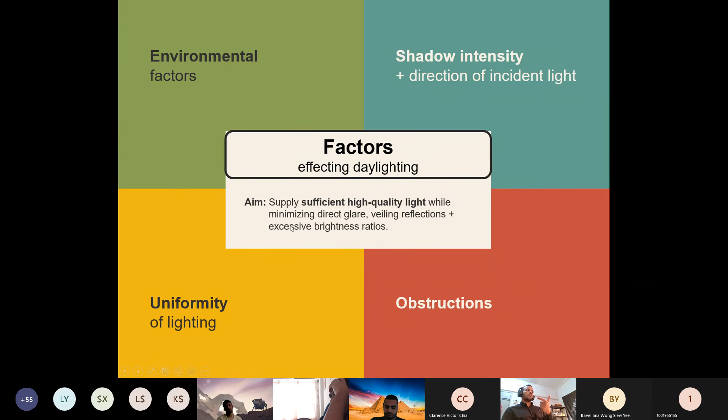So always when we are designing and taking daylight into consideration, we try to supply sufficient high quality light while minimizing direct glare. You know what glare is? In the first or second class we talked about it. Veiling reflections and excessive brightness ratio.

Now, regarding the environmental factors. Basically, one of the environmental factors is building fabric, including the windows, the glazing in the windows, the size of windows, and the position of windows. So the orientation. All these factors are under the environmental factor, the main factor. All these will have an impact on the end quality of light that you will get in your space.

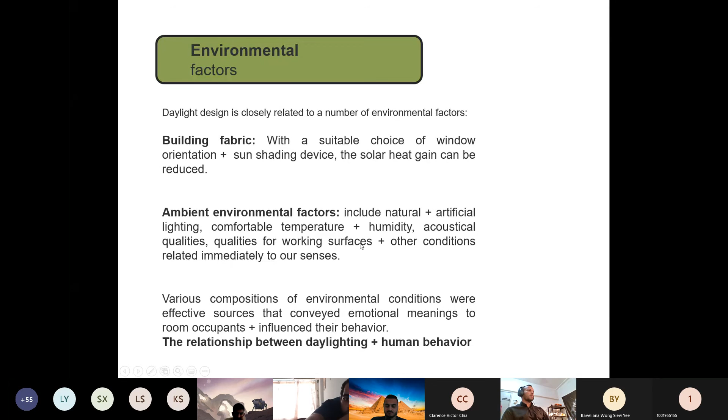Right? And under this there is the ambient environmental factor, including natural plus artificial light, and comfortable temperature. So basically, light can have an impact on temperature, because sometimes light comes with heat, so it will have an impact on the comfort of the occupant. Of course, it can also have an impact on the working surface, depending on the quantity of light falling on these surfaces.

Okay, let's see the second. So obstructions. When you are designing any building, there is always obstruction, either other buildings or trees or any form of structures close to the building. For example, simply if the surrounding buildings are white, the quality of the light that you are designing for your project will be affected.

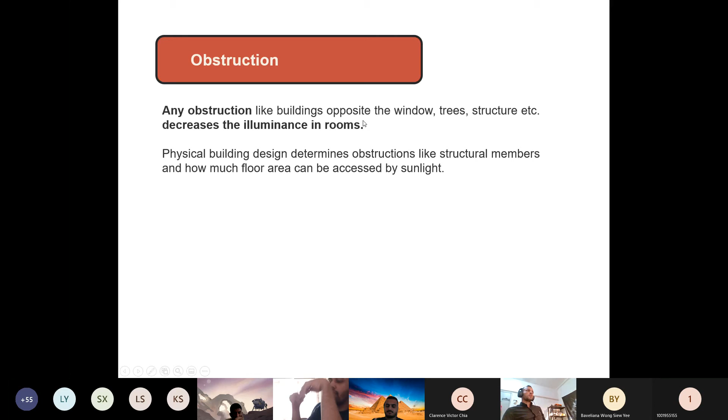On the contrary, if the color is another color like black or brown, the quality of the light in your project will be affected by these obstruction parameters.

So uniformity, light uniformity is a very known thing. It's like when we say lighting illuminance, luminance, or daylighting factor. Lighting uniformity is a very known thing in architecture, so you have to remember it.

Uniformity of light is expressed by the ratio of minimum illuminance in the room to the average illuminance measured on a horizontal reference plane. This uniformity considers only the illuminance level in one space, the interior, not like the daylighting factor where we measure outside and inside and do the ratio. So it's basically the minimum illuminance over the average illuminance in a specific space.

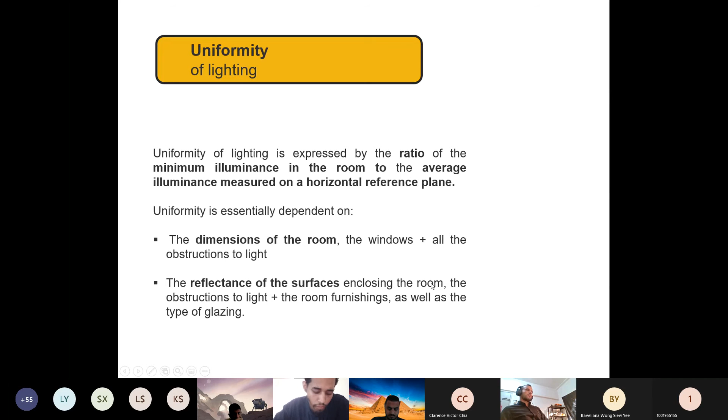Uniformity is essentially dependent on the dimensions of the room, the openings, and any other obstructions to light, as well as the reflectance of surfaces enclosing the room, and the glazing type, as mentioned here.

As you can see, since it's a ratio, it can be expressed as a percentage. The more it's close to 1 or 100%, the better. The more it's less, the less good it is.

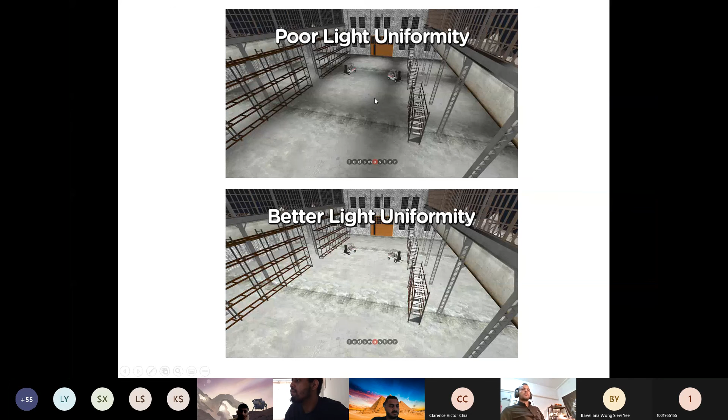So please remember light uniformity. There is even some software that calculates light uniformity in your space, so they can simulate it.

Now remember, we are under the environmental factors, right? So here, regarding shadow intensity and direction of light, for the perception of solidity and surface texture of objects, a reasonable shadow intensity is required.

Shadow intensity is generally generated by the lateral incidence of daylight into rooms from the opening. For example, the working position should be arranged so that hand and body shadows do not fall on the working surface. If we are using artificial light, the angle of incidence should not create too much shadow where you are writing, otherwise it's not efficient.

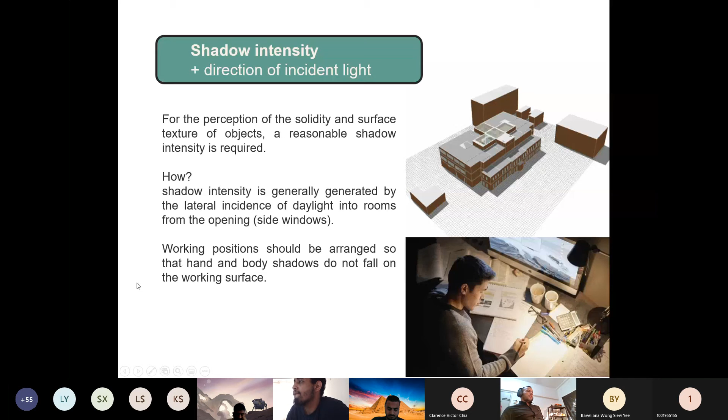So here regarding lighting considerations, there are three main things we consider: the implementation process, which includes whether the design option is costly, practical, and energy saving, and also the quality of light.

Now we have to consider the lighting quality, for example the space and workplace consideration: what kind of tasks will be in the specific space, and what lighting quality are we looking for.

Also light distribution: do we need a uniform distribution in the space? For example, in a parking lot we don't really care a lot about lighting distribution compared to a mall. On the other hand, lighting quantity always has standards regarding the amount of luminance or light that should fall on the working plane, so we always have to consider this too.

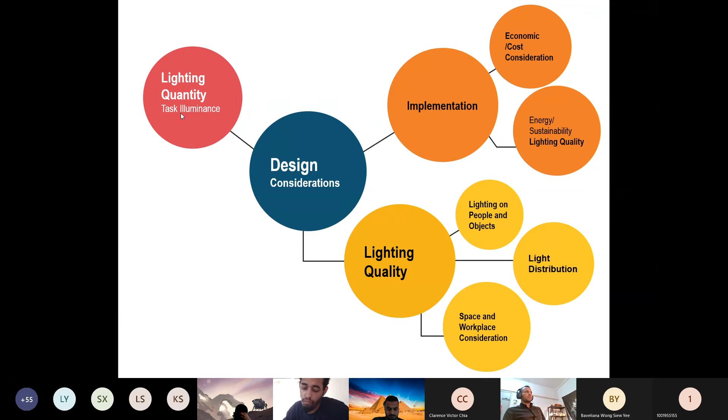So, part 2, do you have any questions? Okay, no questions. It means you understand everything.

The following slides are very important, because as I mentioned many times, the work of an architect is about taking the best decision, and there is always a limited number of decisions, maybe hundreds or even thousands. That's why nowadays we try to use software to help us find the best decision. But when we focus on passive design, as you know, there is passive design strategy and there are active design strategies. So what is the difference?

Young Woon Kan, what do you mean by active techniques or active strategies and passive ones? Yes? I cannot hear you. You are not talking. I'm not talking? Sorry, no, I'm actually thinking. So the question is, what's the difference between active technology and techniques, and passive? Let me repeat: what is the difference between active lighting design strategies and passive lighting design strategies? Hold on.

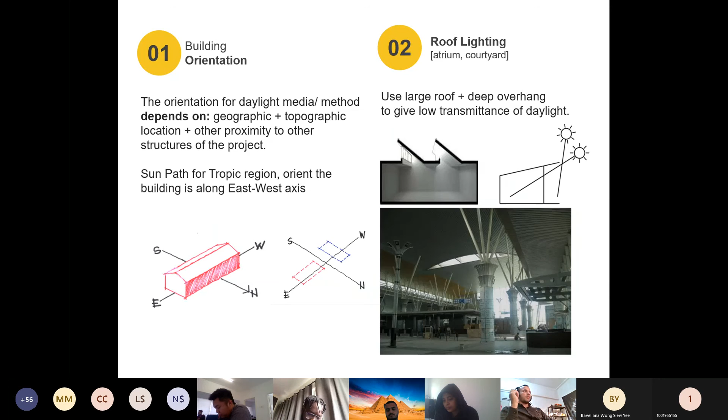So here we continue talking about roofs. As you can see here, we are showing you skylights. Remember, all of this is free, it's passive. Nothing is consuming energy to provide lighting quality like this. That's why in design studio you have to apply these kinds of things from the very beginning, before you start thinking about lighting fixtures or active systems. You have to focus on these things first.

You know what an atrium is, right? An atrium can be covered like this, or it can be open without glazing. But of course, without glazing, you have to be careful of rain, and sometimes careful of solar radiation, because in Malaysia, most of the time the sun is above us, so solar radiation is a big danger. This means if you want to close it using glazing, you cannot use just any type, and you cannot use a single layer of glazing.

Otherwise, if you don't have a passive system for natural ventilation, it will be a problem. Generally, we can make this atrium glazing open automatically depending on sensors. They will measure the heat of the space inside. If it is very hot, they will open to ensure natural ventilation, and if it is rainy, they will close. So it depends on the weather; they will perform accordingly. There will be a kind of active system at that time, but it's not a big problem because they will not keep opening and closing constantly, maybe once or twice per week or once per day. So it's not really a fully passive system, but we can still consider it passive, even though there are motors that work to open it.

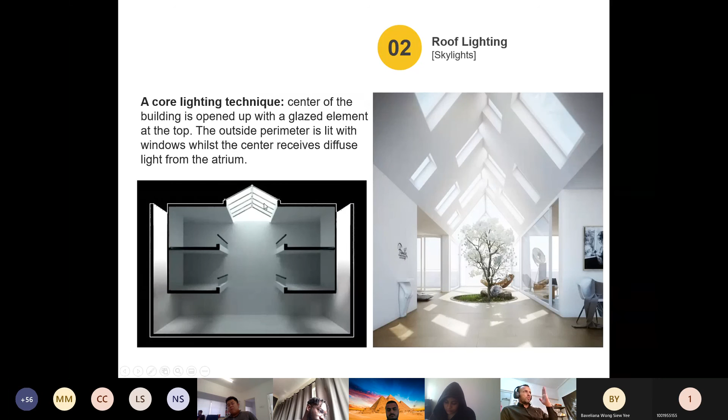For roof lighting, there are some techniques, because if the sun is positioned here with normal glazing, the sun can go directly into the space. Generally we use atriums within a building, and we want to ensure a considerable amount of lighting in these spaces, since these spaces have windows we can open without any problem.

But these spaces, if the building is too high, imagine condominiums like Ankasa or Pancoran here close to UCSI, there is kind of atriums and they are open. So basically the more you go up, the more the luminance will increase because the sky is above us. But down, it's darker compared to up.

But at least it's good. That's why if you see many windows in this condominium, they are open toward the corridor where there is the atrium. So it's good for ventilation and good for lighting. So many birds with just one stone.

So as an architect, imagine if they didn't make an atrium here, the interior spaces will be very dark. Always we are switching on the lighting, so every day you are consuming energy. So in the end of the year, we will find we consume too much energy.

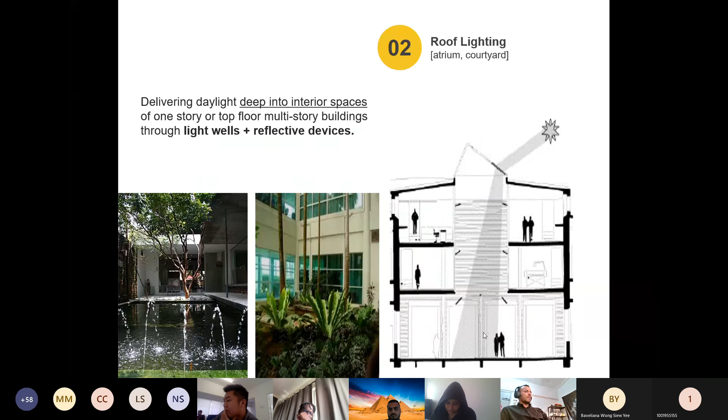You know this one, right? This one is Petronas. So basically this one is like an atrium, but it's covered, as you can see, maybe 70% or more, 80% is covered. But they still use the natural light here. Imagine if there is nothing, if this doesn't exist.

So basically you will see too many artificial lights in here, switched on at this time. As you can see, it's a very simple decision, just to consider the natural light so we forget about switching on electricity.

And this kind of thing will remain until the whole life of the building. And generally, we don't really need too much maintenance like artificial light, where you need to change it. And it's natural.

Space planning. As I mentioned in the example I gave you, the proper introduction of daylight into the interior is to satisfy the biological need of the mind plus body for a change of comfort, to provide visual variety with controlled luminance contrast.

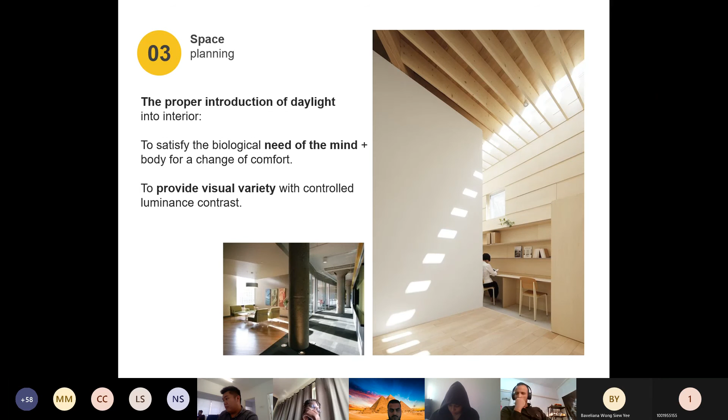It doesn't mean you just open the window and it's enough for ensuring equal daylight in my space. I still need to think about the position of all the furniture and what will happen in my building.

So as we mentioned many times, everybody knows color. The color can reflect light. So if it is a clear color like white, it will reflect light. And dark colors will absorb more heat and will absorb light also.

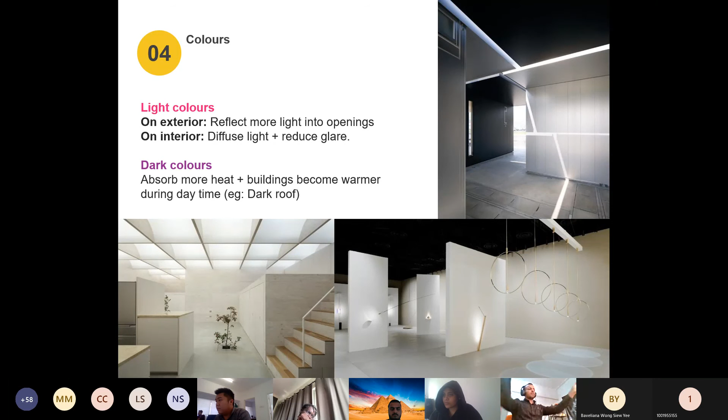So color, it's kind of a passive thing we are using. We are not consuming electricity to change color. Even though there are some windows that can change color, it's chemical, not electrical windows.

Position of windows, I think this one is clear. So the fenestration strategy - the admission of daylight into structures is frequently accomplished by windows, or it can also be curtain walls, especially in commercial buildings. So the position and the size of the window is important, whether it is vertical or horizontal, through the roof like a skylight, or just a normal window.

And type of window here, so position and type of openings. I think these ones you are very familiar with.

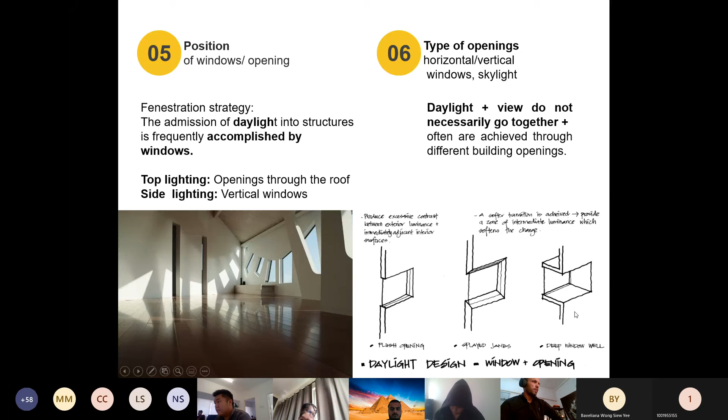As you can see here, same design, we can use different configurations of windows. As you can see here, it's very dark, but when we insert multiple windows on the sides, it becomes clear. We can also use this kind of design option.

So the advantage of this one is like a light shelf. Basically light will come like this, and this area is white, so it will reflect light like this. And this one also uses a color which can reflect, and it will reflect again the light until it tries to reach maximum area. So the advantage of this compared to a regular window is, basically, if the glazing is not good enough, a lot of heat will enter.

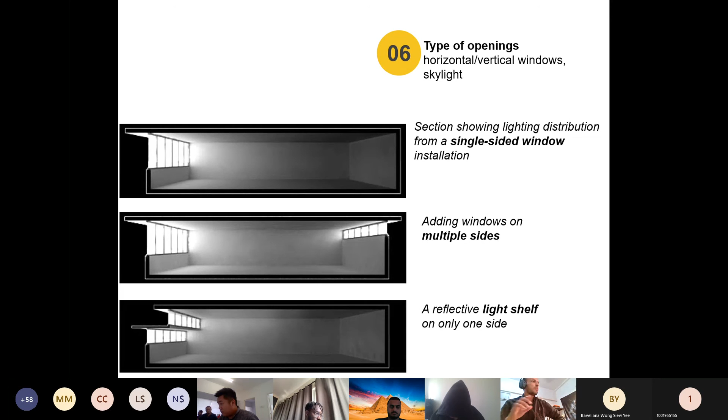However, this one, since it's a reflection, the first reflection heat will be lost here on this surface. So basically light will go through. Even though it's the same area of window if you compare this to this, just by using a light shelf with reflective material, we can innovate and bring other solutions to the table. So in Design Studio, you should not keep thinking about just making an opening. You will see more examples, because we as architects have too many options for passive design.

So here you have to know that for vertical windows, useful daylight penetration is up to a depth equal to 2.5 times the height of the effective window head above the horizontal surface of interest. So basically, normally this A should stop here because the window is just here. So useful daylight will only reach a distance of 2.5 times the height of the top of the window above the work plane, usually taken at the desk.

In a standard office building with a window height of 2.5 meters, this means a maximum of about 5 to 7 meters. So as you can see, this is a very basic rule of thumb, but it's very important. If you have a window, let's say 1 meter height, the useful daylight will reach only 1 meter multiplied by 2.5, so 2.5 meters. After that, some light will reach, but it will not be really useful in doing your task.

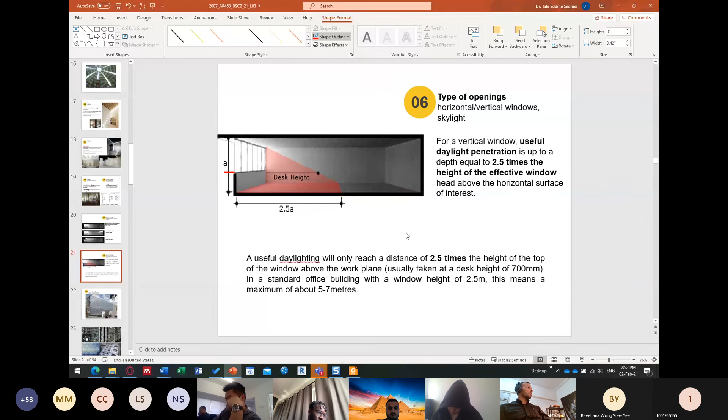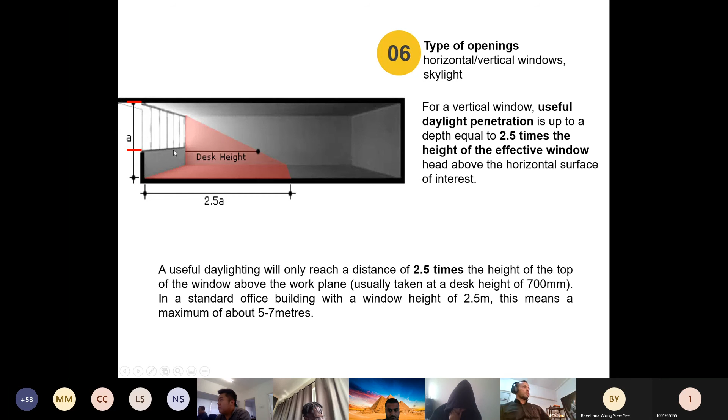If there are no clouds in the sky, you will probably enjoy the daylight without switching on the artificial lights. Of course, it depends on the orientation of the building and the window. But here we are considering diffused light, so it should not be directly opposite the sun. Because at sunset, sun can even reach here, but that is not useful daylight anyway.

Do you know this building? Lum Wen Hua, do you know this building? Are you an expert in Lumion, because your name starts with Lum? No. You don't use Lumion? I know what it is. Seldom. Okay, so do you know this building? No. What about Merit? Marias, you know this building? No, it's my first time. You didn't visit Paris? Paris, not yet.

So this building is in Paris, France, and they call it the Institut du Monde Arabe, the Institute of the Arabic World. This building is special because, talking about types of openings, there is horizontal, vertical, skylight related to the roof, and dynamic or kinetic openings. The elevation you are seeing is full of dynamic or kinetic openings, or a kinetic facade as a whole.

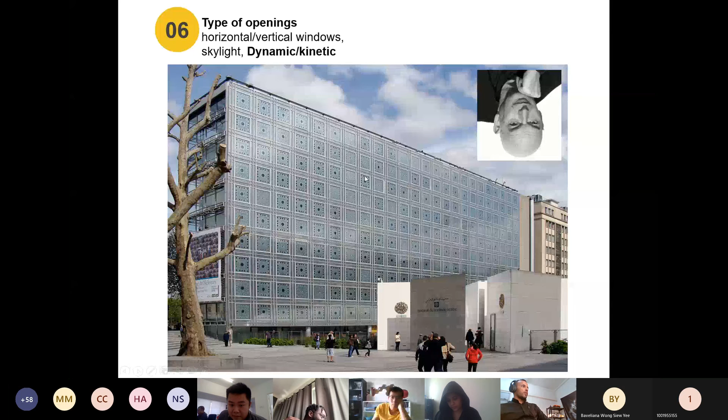The architect is Jean Nouvel, a very known French architect. If you go inside, you will find this system. I don't know if you know Musharabiyya, but in the Arabic world they used Musharabiyya, a piece of wood which contains many holes. They invented it because generally in the Arabic culture they don't like women to show, to go outside without the hijab and this kind of things.

So there is this Musharabiyya. So women, they are able to see outside without others seeing them. And the second thing, it can bring light. So that's why they use it in mosques a lot. You will find kind of wood, like decoration wood with many holes or decoration.

So it can let the air enter. It can let the light enter in a kind of interesting way, and it will also allow those who are inside to be in a private space where they can see what is going on outside, but others cannot see them. Anyway, so this is the concept of this architect.

He wanted to use this Musharabiyya concept, but of course, in architecture you should not take something and just plaque it. So he wanted to be innovative. He is a very big architect. So since it's a museum, and you know, in a museum we don't like direct sunlight to enter the space, his idea was to use this Musharabiyya system and develop a mechanical system which will allow some or most of the opening.

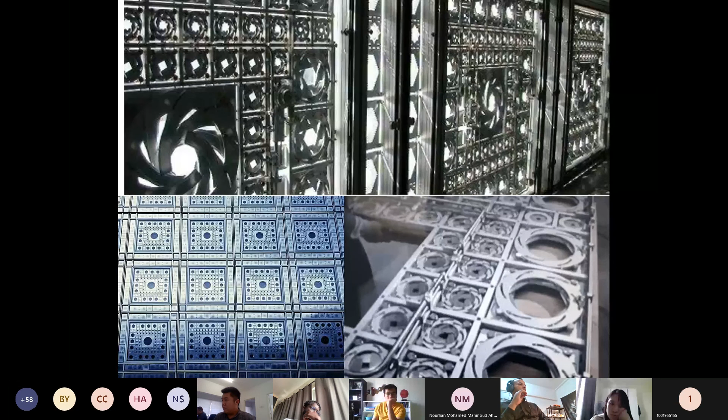of course, this idea is implemented in many projects, not only this one. I believe you know this project. It's Al Bahr Tower in Dubai. As you know, the weather in Dubai is very harsh. It's a desert area, so the temperature can reach very high degrees. So to build a building with just glazing and not protect the glazing is really the biggest stupid idea on the planet.

So you should not do this, even though I know there are many glazed buildings in Dubai, but of course they use very sophisticated glazing, not the glazing you usually find. Even double glazing doesn't work in this kind of climate.

Anyway, the architect also proposed this because his concept is also coming from the Musharabiyya. As I mentioned, Musharabiyya is like a piece of wood which has decoration. Okay, maybe I will just search on the internet so you see what we mean by Musharabiyya. So this is what I'm talking about. This one, they call it Musharabiyya in the Arab world.

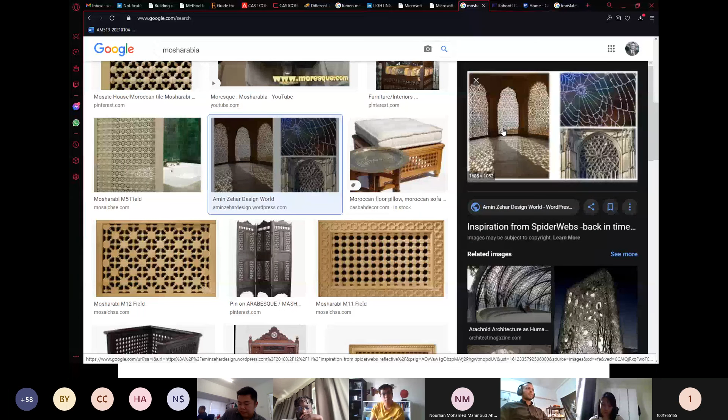You see here? I think this one is Pakistan, so Osama knows these kinds of things. Yeah, here is a very old one. So basically, you see there are windows and they are full of that Musharabiyya. So those that are inside can see the outside without being seen by others. Anyway, let's go back to this.

So this guy also brought the idea from Musharabiyya. Because generally Musharabiyya is used to protect from sun, to ensure privacy, and to create ventilation. So this guy took that idea, but he's using it only for lighting and heat gain prevention. He wanted to decrease the solar radiation falling on the surface of the project.

That's why this system is mechanical, and it contains many motors that do this movement. It's not for free, so there are motors that move these things. And of course there are sensors. So it's not about pressing a button. There is a computer which does all the calculation. There are many sensors on all these elevations,

and depending on the sun position, the sun, for example, is on the other side. And it's an office building. I would like people to see the outside. I want the view. So automatically, the computer will know the sun is on the other side. There is no heat from this side, and we can get diffused light for free. So why should it be closed? Okay, so open it to a certain degree, of course.

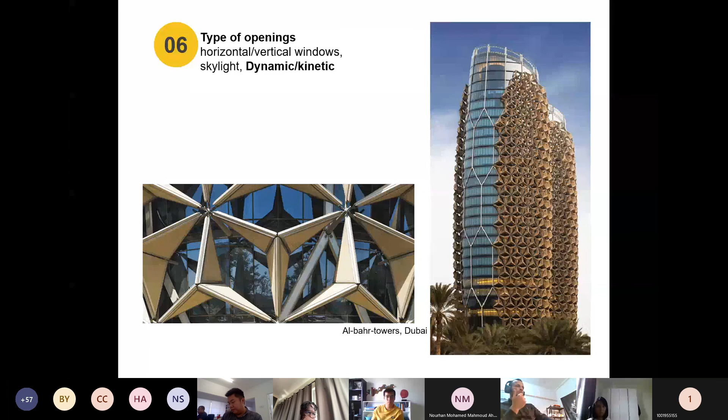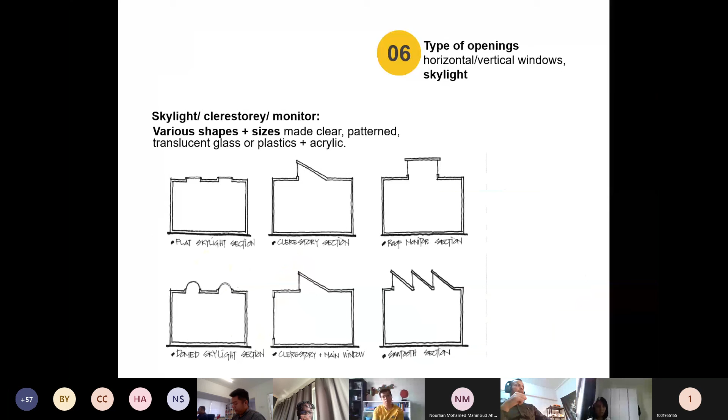Now, we'll talk about glazing. It's always an issue. It's always a dilemma because we want light, but we don't want heat in Malaysia. So if you just make openings and you forget about heat, this means you don't understand anything. And it's not good. You cannot forget about heat when you talk about glazing. So you should not take glazing only as a source of view and natural light. There is always the issue of heat here in Malaysia.

So we can use double glazing to reduce noise, and of course it will reduce heat somehow, not that much. But actually there are more sophisticated technologies we can use, especially regarding heat, because if you build a totally glazed building, like buildings we are seeing recently in Malaysia or in Dubai, and you just use normal glazing, you can cook chicken inside it. So you should not do that.

So generally most of the buildings you see in Dubai use what they call coated glazing. They use chemical materials to make a coat on the glazing. So this is an example, the use of low-E glazing. Low-E glazing is used a lot especially in countries where there is winter. In Malaysia they also use it, even though some people say it's not good to use low-E, because low-E glazing is actually very expensive.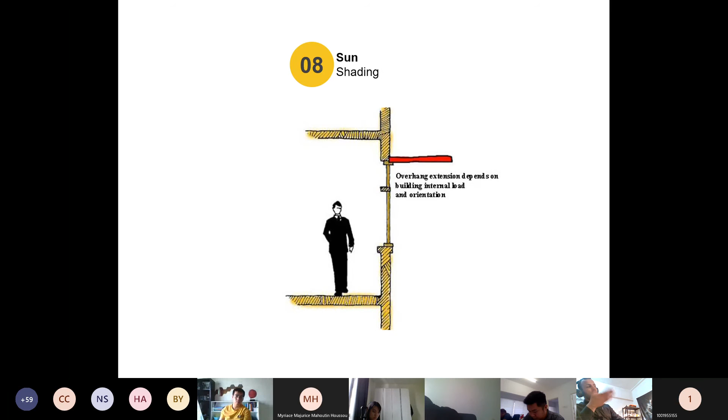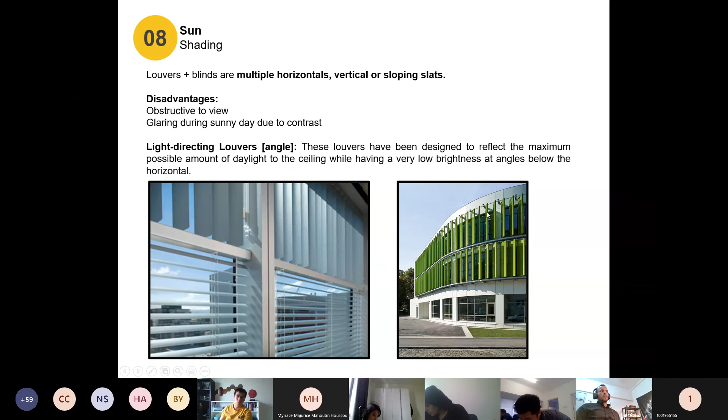Of course it can be horizontal or vertical, and even egg crate, so there are many types of shading. And it can be a kind of louver system also, so repetition of shading devices, as you can see here. Of course, when it is made as a louver system, it can obstruct the view, and also it can create glare during a sunny day due to contrast, because if you are inside, between these openings there will be too much light contrast in that area, so the brightness will be high. Another advantage of louver systems is that they can generally move, either manually or mechanically.

Now we will talk about passive lighting systems. Here are different passive lighting systems. There is prismatic glass. There are light shelves. There is the heliostat. And there are light tubes. And there are anidolic ceilings.

Are you familiar with the heliostat? This one. Are you familiar with this? No. Okay, as you can see, there are many options that you can use in your design studio projects.

So prismatic glass. This technology is within the glass. It's applied on the top third of the window to divert the beam of sunlight, meaning the ray of sunlight, upward to the ceiling, which will then diffuse it to the rear part of the room. We will see examples of each one anyway. So light shelves, here is the definition. And heliostat, here is the definition. But anyway, we will go through them one by one.

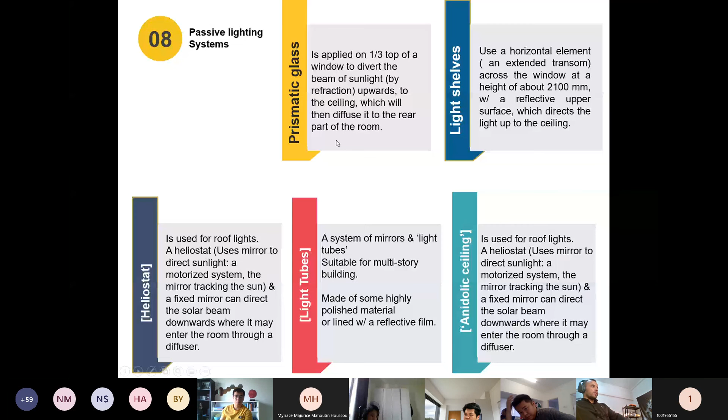So this is the one we were talking about, prismatic glass. It's a type of glass which is not flat. It's designed in a way that it can reflect the light coming from the sun here. It will be reflected to the ceiling just because of the design of the glass in your window. This one is passive, of course. You just need to buy this glazing type, install it and forget it. No maintenance, nothing. So this light will be diffused to the ceiling, and from the ceiling it will go to the remaining spaces in your room. So it's useful for interiors that can't be reached by daylighting from a side window.

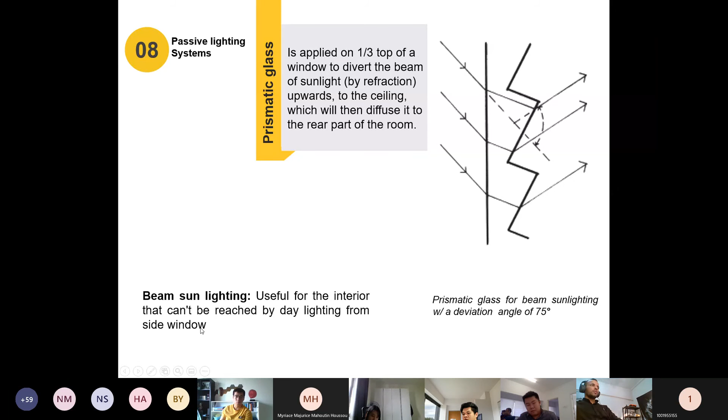Okay, let's go to the second thing, light shelves. When you see anything like this, we call it light shelves. Please focus. If you don't know what a light shelf means, you cannot call yourself an architect. That's why you will see questions like this in the quiz. It's like you are a doctor in medicine and they ask you what an ear is, and you tell me you don't know what an ear or an eye is.

So again, light shelf - the use of a horizontal element, an extended transom across the window at the height of about 2100 millimeters with a reflective upper surface which directs the light up to the ceiling.

This is a very simple way of doing it. As you can see, there is a big opening here. So we take a kind of shading device, a horizontal plane, and put it here, and it should be white. So when the light comes here, the reflection angle is equal to the angle of incidence. If it's coming in at 40 degrees, it will be reflected at 40 degrees also. So when it's reflected, it can go inside the project, and it's free.

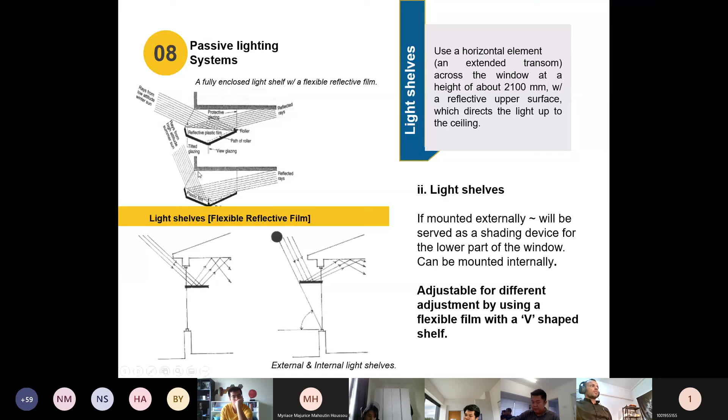There are some other shapes. Since we know the behavior of light beams, we can create specific shapes with specific angles in order to send the light beams as far as possible. Of course, this kind of thing depends on the region, because some areas like Malaysia depend on the sun path and the orientation.

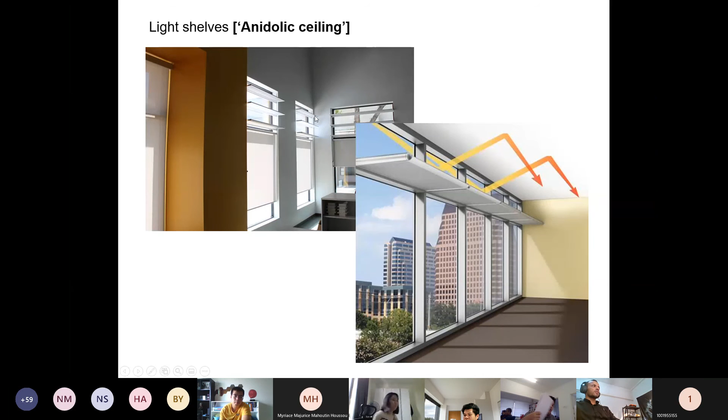Here are some images of these light shelves. For example, if this element didn't exist, you would see it very dark here compared to now. As you can see, this light here is coming because of the reflection of these light shelves. It can contain different levels also, not only one.

Now here is the heliostat. The heliostat is used for roof lighting. It uses a mirror to direct sunlight - the keyword is mirror. We use a mirror and a motorized system. The mirror will track the sun, and a fixed mirror can direct the solar beam downward where it may enter the room through a diffuser.

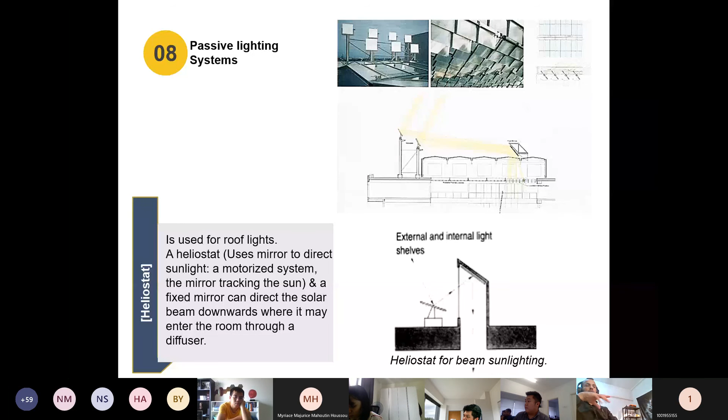If you've noticed, if a mirror reflects the sun onto your face, the amount of light coming to your face can heat you. This means the mirror doesn't just reflect light, it can reflect heat too. That's why in cold climates like Russia, they use this kind of technique a lot. In Russia, lighting is really valuable, not like in Malaysia where the quantity of natural light is too high compared to these countries. That's why they always use all these techniques.

Now, after seeing all these mirrors and reflections, the second part of the heliostat is this. As you can see here, there is reflection - they can create a system like this. Basically it contains a mirror, and this one will diffuse the light.

In your space, for example, if you have an atrium - as you can see, this atrium is very small - without this kind of reflection, it probably wouldn't be effective. Especially since we have too many windows here facing the wall, it's really a terrible design without this kind of thing. At least we create this kind of system to improve the quality.

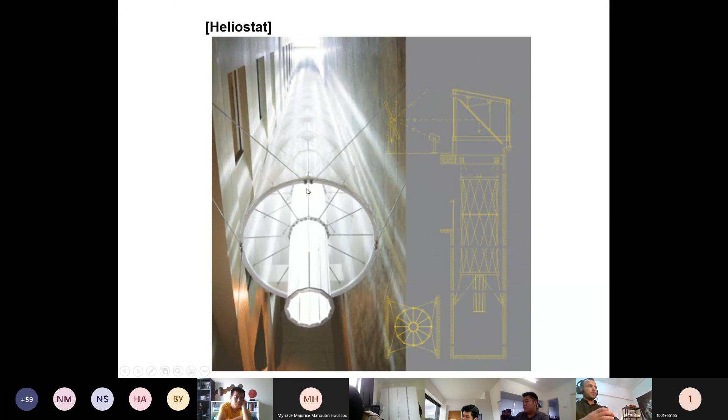Do you know this project? Let me share again because there's a video after that.

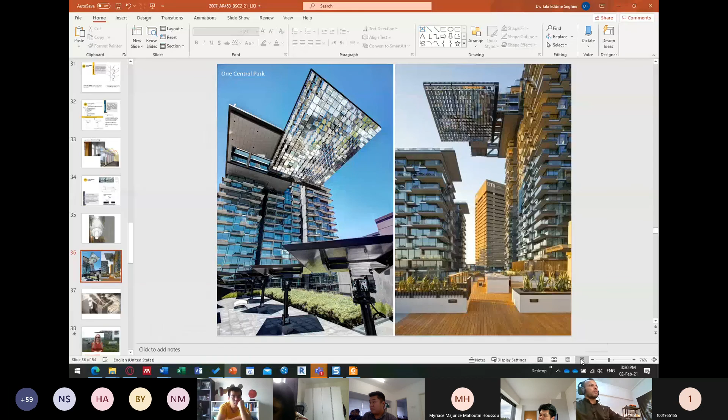Do you know this project? Helen Lim. Sorry, I don't know this. Okay.

It's a project in Sydney, near UTS, University of Technology Sydney. This project is designed by the same architect, Jean Nouvel, who developed the dynamic elevation you saw in the Institute of the Arab World. He's a big architect who always considers passive lighting strategies. In this second project, he's trying his best to solve an issue regarding lighting using natural light.

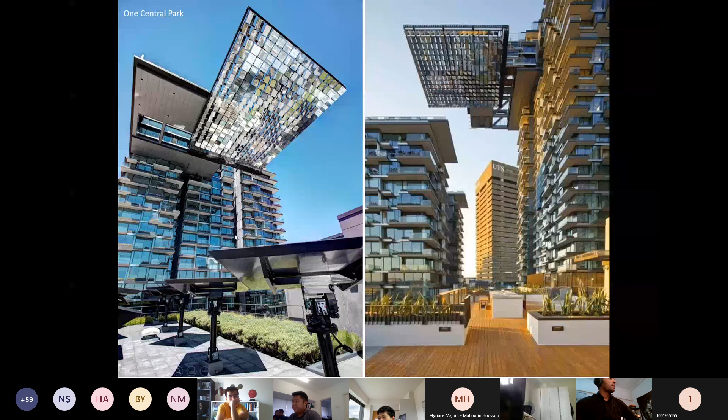Let me share again. The special thing about this project is that you see too many mirrors here, and apparently there are mirrors here also. This is the same project you were seeing, and this is the mirror above. As you can see here, there's another building containing mirrors. This architect is trying his best, creating many mirrors just to solve an issue. When you see the video, please listen and you will know what the issue is.

I'm standing in front of a structure that's caused more head-scratching, confusion and discussion than just about any other in Australia in recent times. It's been called everything from a NASA experiment to a projector to a sunscreen to an edible roof garden. What it is, is a heliostat, and it's unique. Let's go and take a look.

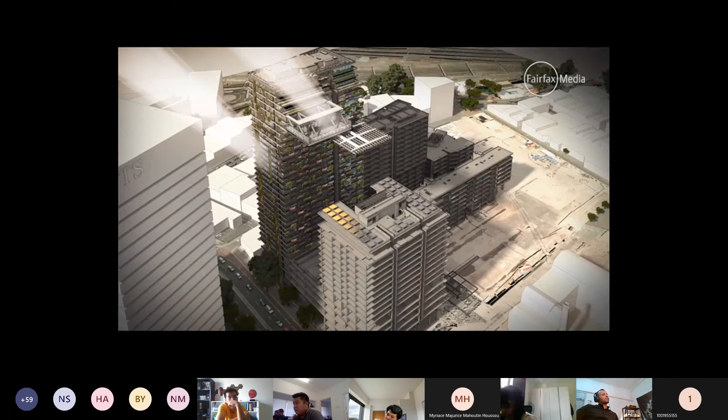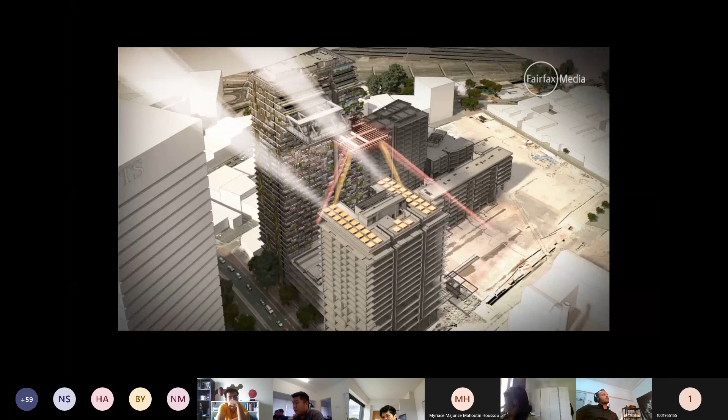This is the old Carlton United Brewery site, which now incorporates some of the most innovative, environmentally sensitive design ideas you're likely to see anywhere in Australia. The heliostat is unique to a residential structure, probably the only one we know of in existence here and around the world. Essentially, the heliostat forms two aspects. The first is that it's used as a monumental architectural design element of One Central Park, very noticeable from a distance and at the site. The second aspect is it has a specific function: it's designed to reflect light into the southern corridor of the precinct, which would otherwise be consistently in shadow. It does that through a series of fixed and motorised mirrors that track the sun and reflect light from our lower west tower, which sits approximately 100 metres beneath the static or fixed panels over the cantilever, providing the reflective surface to generate light into the southern corridor.

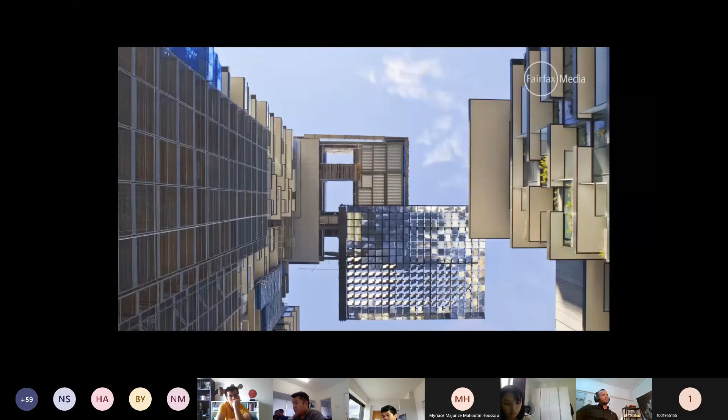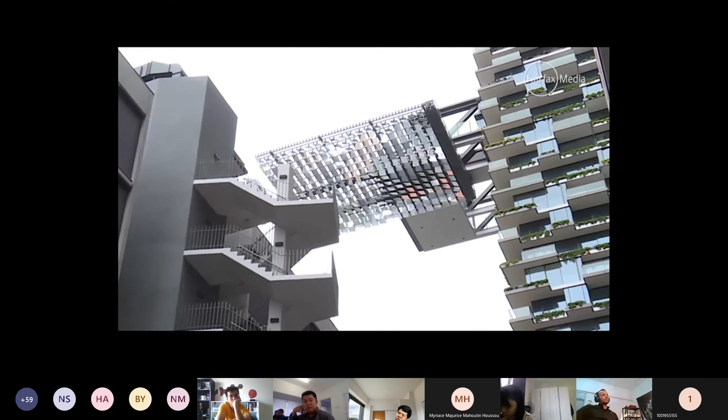The heliostat, or the passive fixed reflective panels, there are about 320 in total, each 1.5 square metres, fixed to the lower part of the cantilever. The cantilever itself juts out from our east building about 42 metres and is held up by 4 trusses that individually weigh approximately 90 tonnes. So a very well-conceived, engineered and resolved piece of architecture.

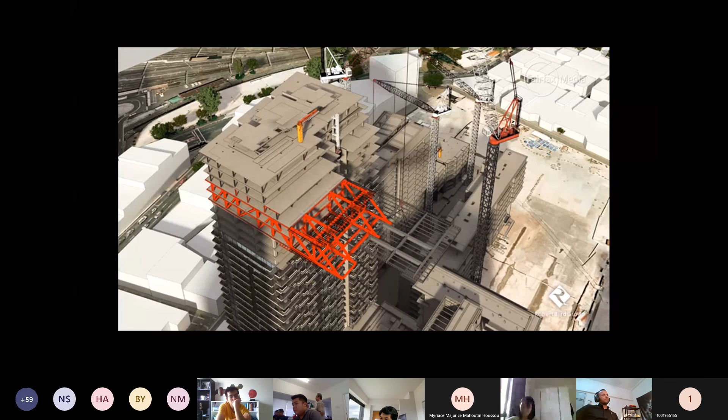At night, it actually forms the backdrop and canvas for a major piece of public art, part of the $8 million program at Central Park. It's a light show by Yann Kersalé, using about 9 LEDs per panel that constantly change and reflect the motion and aspect of Central Park.

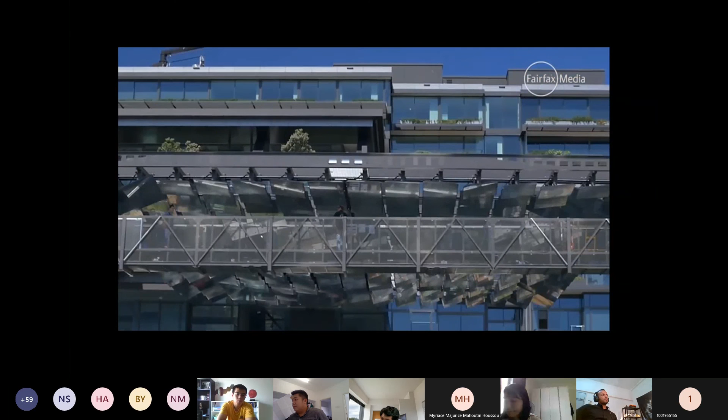So you can see how much architects sometimes spend too much effort to find solutions just to bring natural light. It's a whole structure, not just one mirror. It's integrated into the structure of the building, as you have seen.

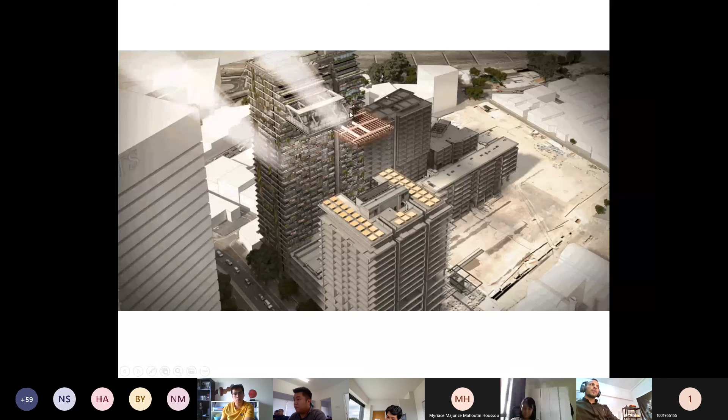Basically, the issue is that these are new buildings, created just recently, and they noticed that if they kept creating this kind of buildings, the public spaces here would become very dark. That's why they decided to make sure these public spaces would have enough natural light coming in, and that's why they created all this structure and the heliostat that you are seeing.

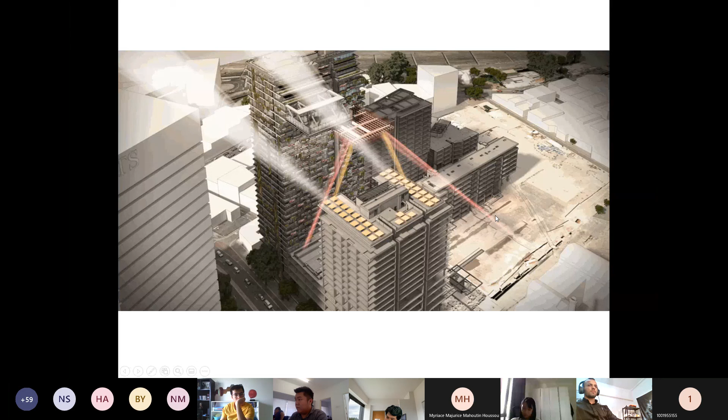Because probably here there will be another project, maybe another building. So this public space should receive a considerable amount of natural light. Okay, so number 8, which is the last one.

Another passive system, called light tubes. As you can see, light tubes are somehow simple compared especially to the heliostat. The idea is always to direct light from the exterior to your space using mirrors. As you can see, they are directing light like they are directing water, using mirrors, of course.

Since we know Snell's law is regarding refraction, but reflection is very simple, so the incident angle of light is equal to the reflection angle. This means the angle of mirrors, we can decide what it should be, so from above until it can reach the space. As you can see, this one, for example, is natural light, not artificial light. So natural light is for free and for life.

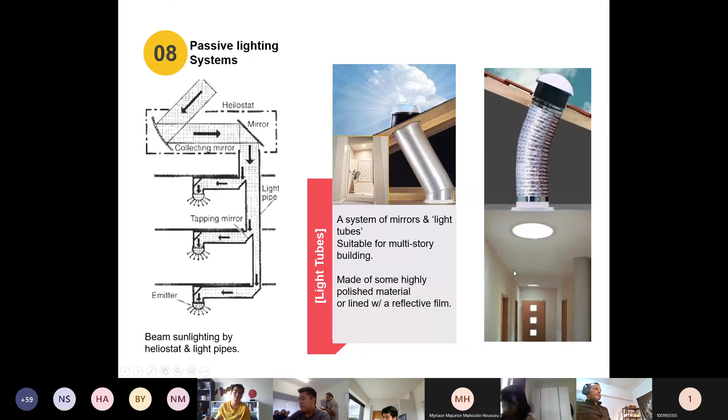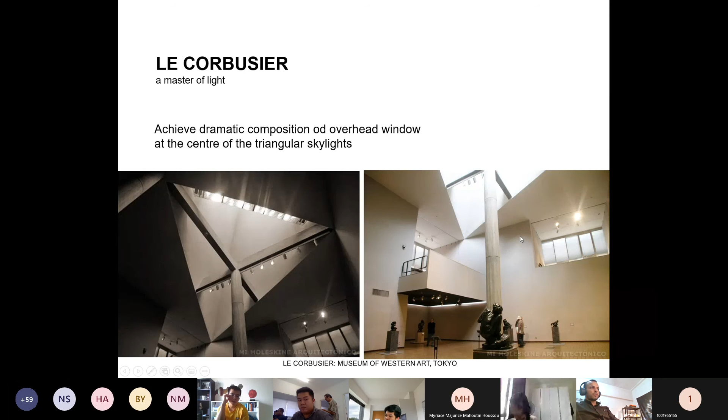Here are some images regarding case studies. Le Corbusier, as you know, used natural light a lot. Of course there is artificial light too, but natural light always plays a role in his buildings. So when you are designing in your design studio, you should not forget about natural light. Good architects are always very strategic in their design. They will not jump just to artificial light, because natural light is always the best.

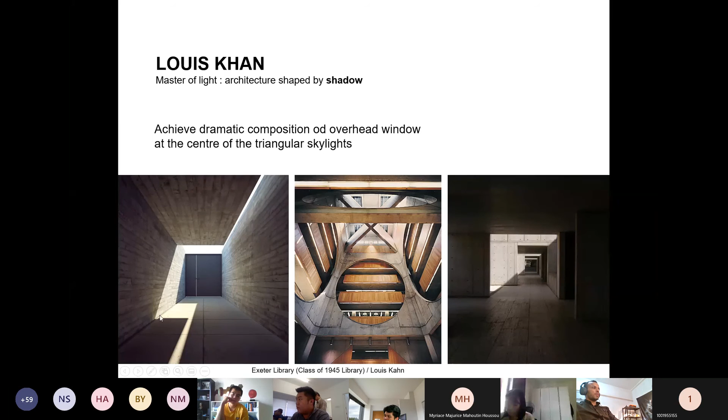Yes, so this guy is Louis Kahn. See how he's playing with light and shadow. Here is another project.

Of course, when it comes to natural light, it always has a relationship with the sun path. If you don't have any idea how the sun will move through the day or through the year in Malaysia, you cannot make decisions about that. That's why in Building Science 1, you learned how to study the angle and position of the sun at any time.

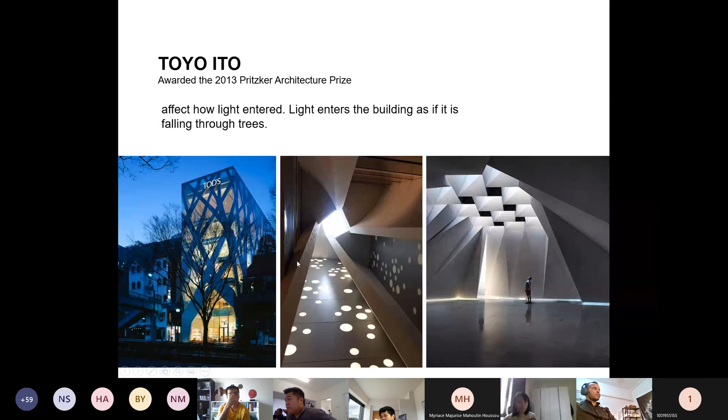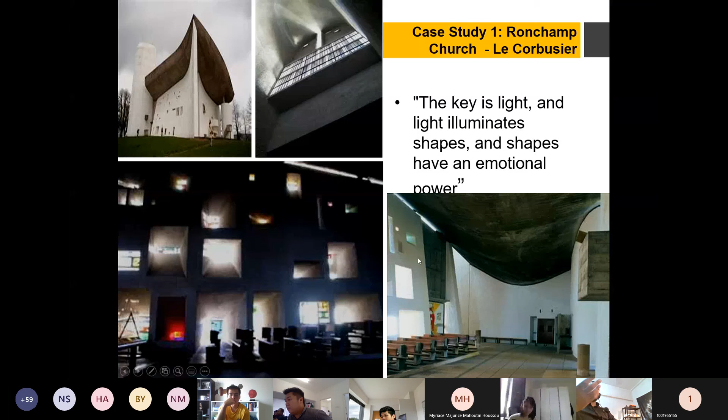So this is Toyo Ito. All big architects consider natural light. It's a very big mistake if you don't consider it, because generally you would have to demolish if you didn't consider it in the beginning.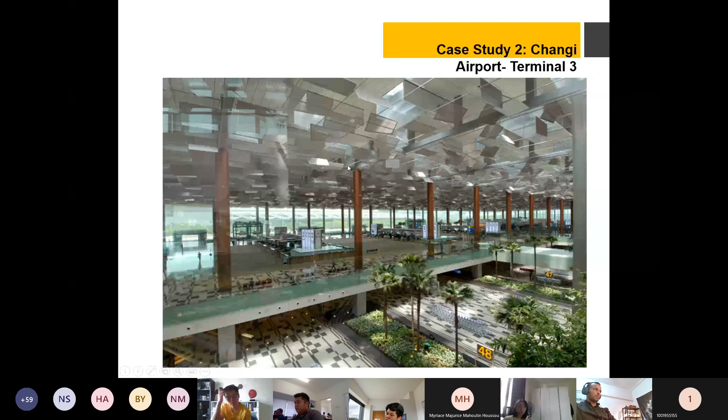Here is an airport, normally Shanghai, or Singapore, or China. Anyway, you see this airport, the daylighting is really efficient. There is no artificial light switched on, only maybe here, but here it's totally natural light. Of course, because they are using a very special roof. It's not just a roof like this. As you can see, there is a kind of skylight, and a kind of reflection.

So of course, it doesn't mean a window should be square and a skylight should be square. Skylights sometimes can be like this, for example, as you can see, they are using a prefabricated component here, and it's repeated.

This is a museum. Of course in a museum we generally don't like direct sunlight to enter, but we would like to see the natural light. Look to the natural light. You are not switching on any light like this.

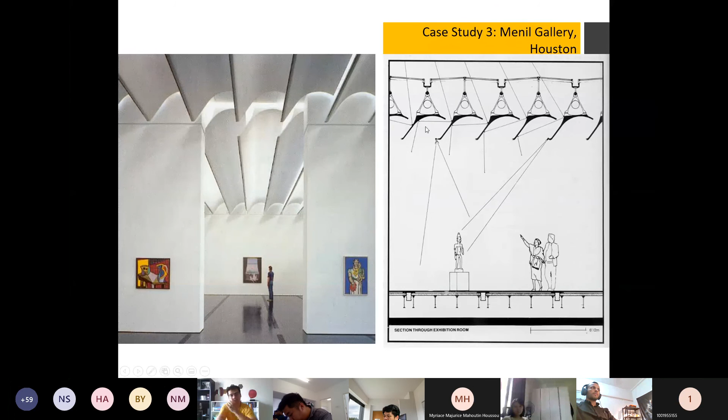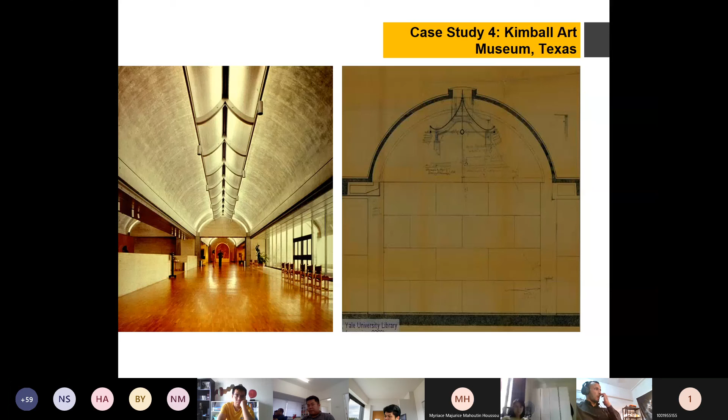Look here also. This one is Kimball Art Museum, Texas. See, just a small decision makes a huge difference in the project. If you see the section, it looks like a very simple project, but look in reality how the natural light coming from the roof has an impact.

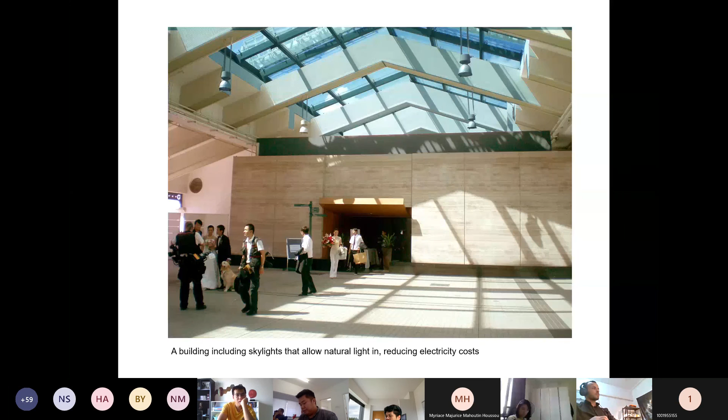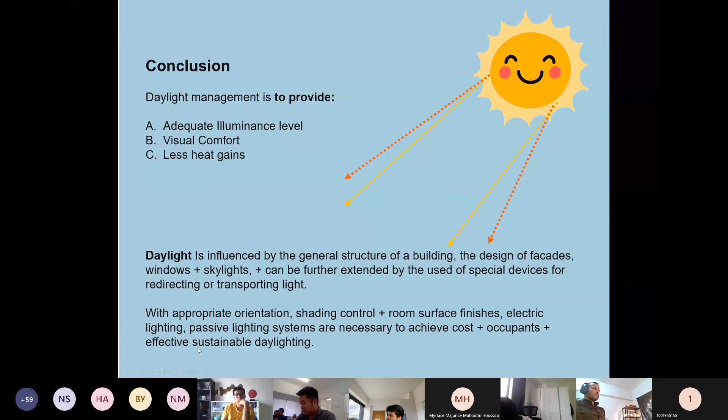So this is the conclusion. Daylight management is to provide adequate illuminance level and visual comfort, and it should also prevent heat. Daylight is influenced by the general structure of the building and the design of the facade, like windows and skylights. It can be further extended by the use of special devices for redirecting or transporting light, basically the passive lighting systems we talked about. So with appropriate orientation, shading control, room surface finishes, electrical lighting, and passive lighting systems, all these are necessary to achieve cost-effective, sustainable daylighting.

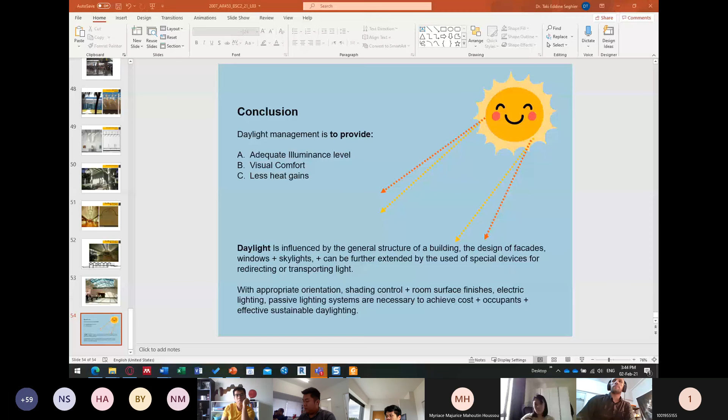So I'm teaching only 10 students or what? From where did you come? From below the chairs? Sorry. This is a good background, looks like I'm teaching you face to face. But well, I cannot see the other students. Okay, I think I have to take notes. These are the attendants, and I don't see them. I have to see them, otherwise you are not here.

It's like Star Wars, this one. So others, they are absent, right?